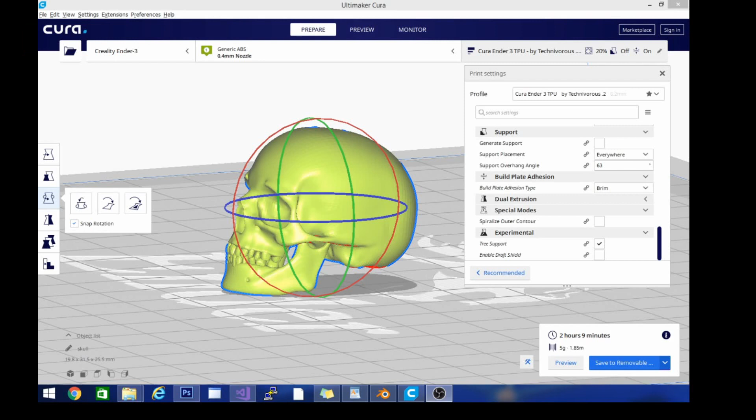This, however, is going to be our profile for TPU, and in fact I've already gone through and set everything up because I've been doing some test printing and dialing in for the direct drive. So we're just going to go over the settings real quick and I'll show you what I've changed.

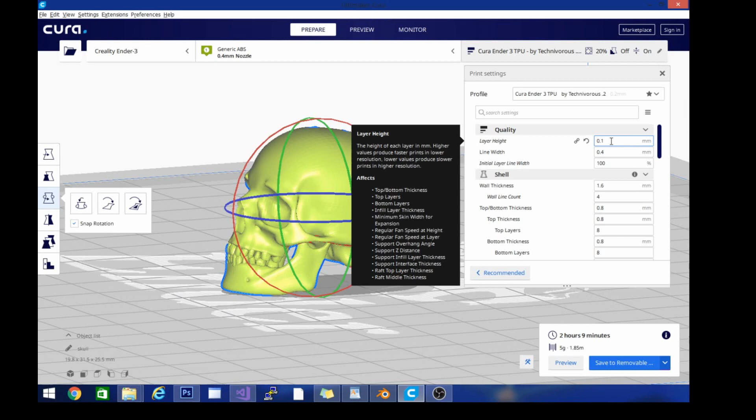Now, at the very top of the list, the first thing I changed was my layer height. I took it down from the standard 0.2 millimeters to 0.1 millimeters, and the reason for that is the less plastic that I'm trying to extrude when it comes to TPU, the more evenly it'll flow, the less retraction there will be, the less jamming and binding there will be in the hot end. So I could take this down even lower and get a higher print quality, but for right now that's pretty low, and we're going to leave it just like that.

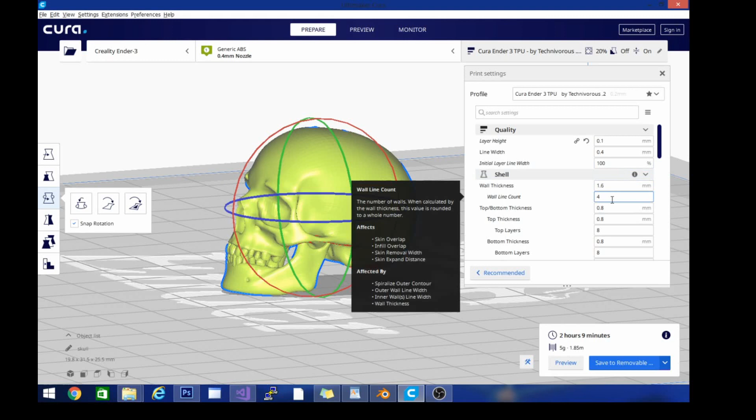So wall thickness, wall line count, all of that stuff stayed the same. You're welcome to change the bottom pattern and all of that. I just noticed my horizontal expansion is on, and I'm not sure why, so we're just going to get rid of that.

And then my infill density at the moment is 20. It's a decent percentage for TPU. If you turn it up a little bit, you will get a little bit less squish. If you turn it down, you'll get a little more squish. But you are going to want some sort of infill in there because it is a flexible filament, and you would be hard-pressed to print the top of this skull bridging with it. So obviously you want to use infill.

The most important settings when it comes to TPU are going to be right in here in the material settings. If you look, I have my nozzle temperature set to 230. That is mid-range. It could go up, could go down depending on the flow of that particular TPU. My build plate temperature is at 55. Now with TPU, you're going to want to keep it below 60 degrees. So that's just good practice. Flow rate, obviously 100%. We don't mess with that too much.

I do have retraction enabled, but I have changed my distance from the normal 6 to 8 millimeters to 1.4 millimeters and lowered my retraction speed to 25. Now this one is the one that matters because this one is calculated and only set if these two are the same. If you look here, you'll notice that my prime speed is set to 10 millimeters a second.

But the fan, the print speed, the retraction settings, and the temperature, you're going to want those all to be consistent. So now that I have that, I'm going to go to my settings, profile, manage profiles. And what you would do in your case after setting these settings, like in all the other videos, is go to create. I have actually already created mine right here. It's Cura Ender 3 TPU. And we are going to go in, we'll just rename it real quick because I did just change this from 0.2 to 0.1. And I like to be able to see what I'm working with.

So now, as you can see, I've got most of my profile set up. I can just go in here, and the nice thing is, if I want to switch, I can just grab this, and here are all of my profiles listed. I can go right to my ABS, and right back to my PLA or to my TPU. You can see it adjusts all my settings here. Apparently I didn't save that properly. So you know what, let's just double check since we're here, and make sure everything is where we want it to be.

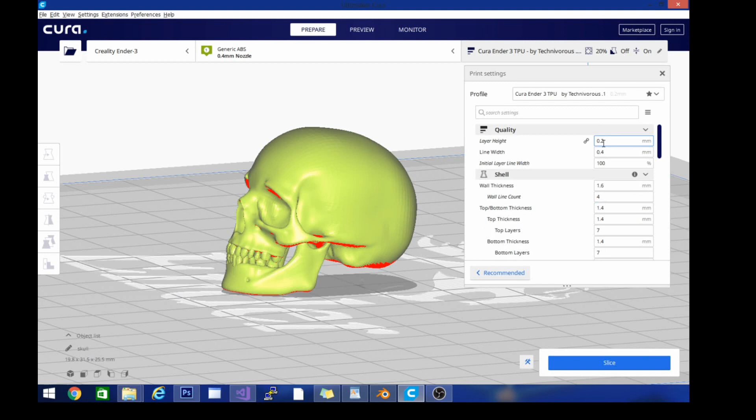I think that's right. One last time, profile, manage profiles. And in fact, all I really need to do is switch and click keep. And then when I switch back, it holds those for me. So I am going to save this properly though. Profile, manage profiles.

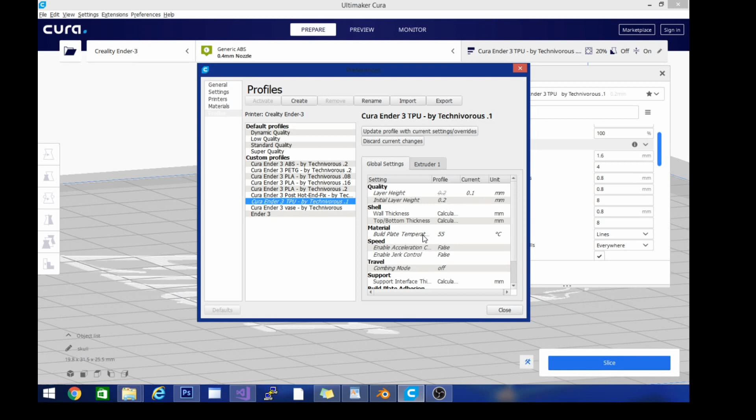And then what you're looking for in order to change it and set the settings is update profile with current settings/overrides. So now, when I jump around, everything stays the same. You can see my height stayed the same and all of that. So that's it for my TPU profile. We're going to be getting into these TPU prints really soon, so stay tuned, guys.

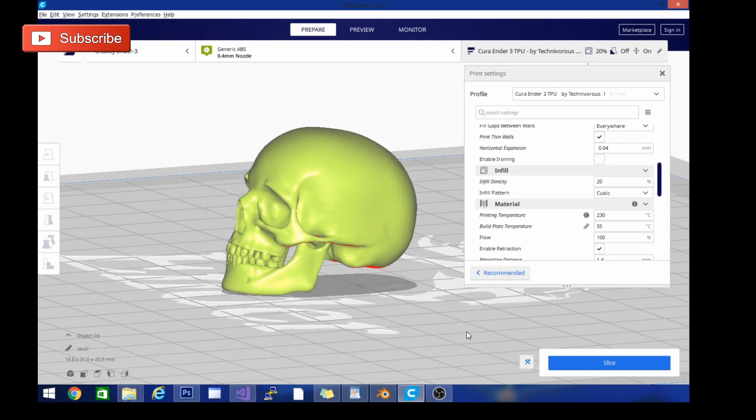This is the final settings video for the Ender 3. Pretty soon we'll be getting into the Ender 5 settings and stuff like that. But first we have a lot of setup on that to do. It's actually not here yet, so it'll be a couple more days.